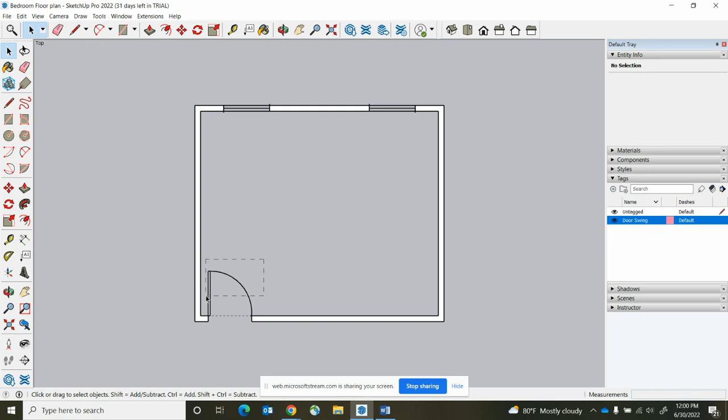Now we're going to make our 2D drawing 3D. First, I want to put my door swing on a different tag or layer to keep things clean. I'll add a tag and name it door swing. I'll select all the parts of my door swing, making sure I get even the bottom ones - you can hit Control to add to the selection. We're going to move it from untagged to door swing, and then turn it off. That'll keep it clean later on.

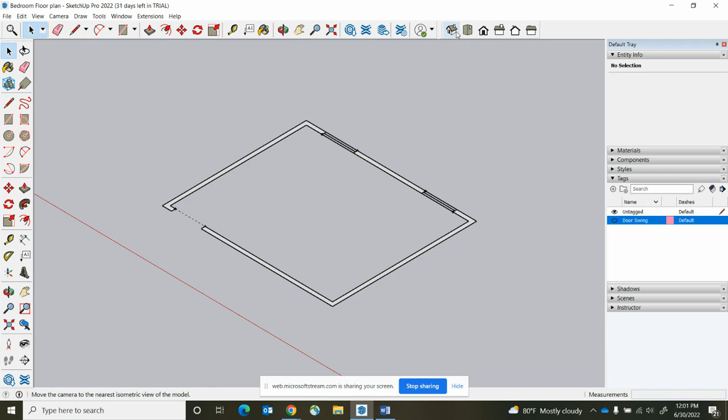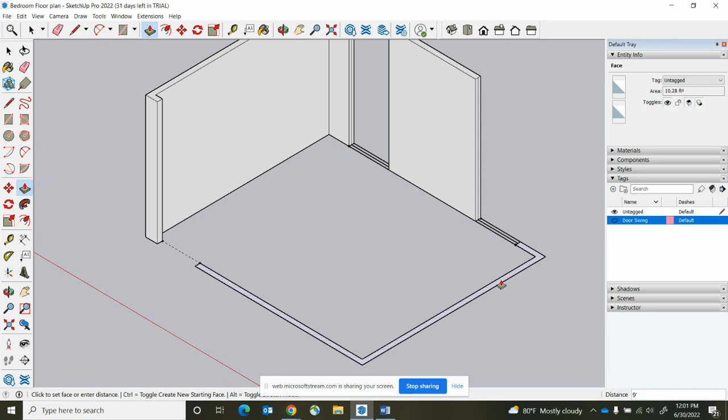Now I want to move to an isometric view to start bringing my walls up. I'm going to use the push pull tool, hover over a wall, and start to pull it up. We're going to make it 9 feet. Now I have a 9-foot wall. You can do the same thing here, bring it up to 9 feet. Once you've done a measurement, you can hover to where it's highlighted and double click, and it's automatically going to bring it up to that same height. So now I have walls.

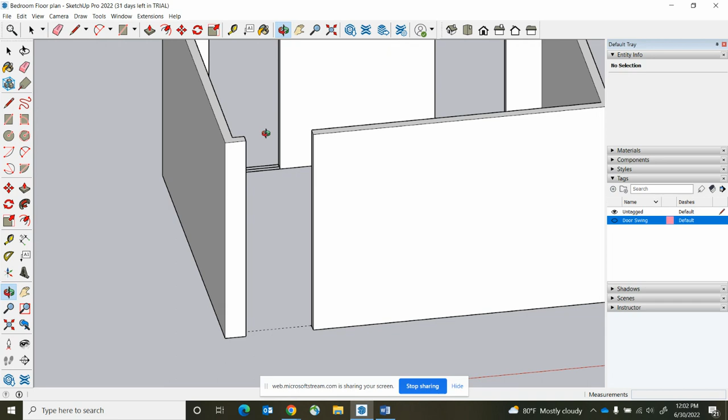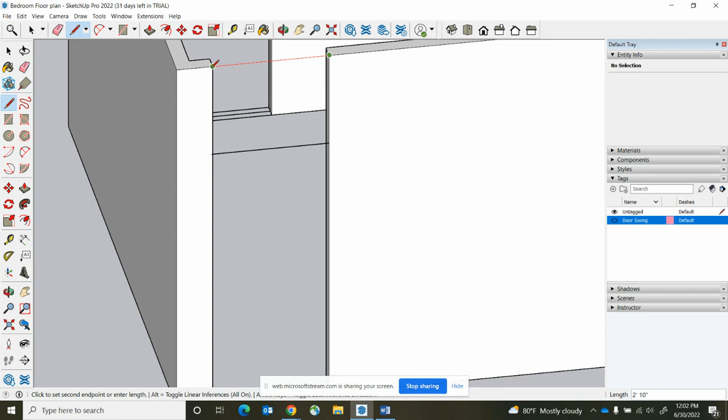There's a few more things we need to do to make it clean. We've got to finish up our walls jointed above where the door is and the windows. I'm going to use my guide tool. Typical residential doors are 6 foot 8 inches high, so I'm going to put a guide mark there. I'll use my pencil, go over the guide point - make sure you're on that red axis all the way to on edge - and then come up to the end point, again red axis to the other endpoint to fill it in. If you're not on the red axis, you might end up drawing from the front to the back, and that's going to create issues. If you run into a problem, just check that.

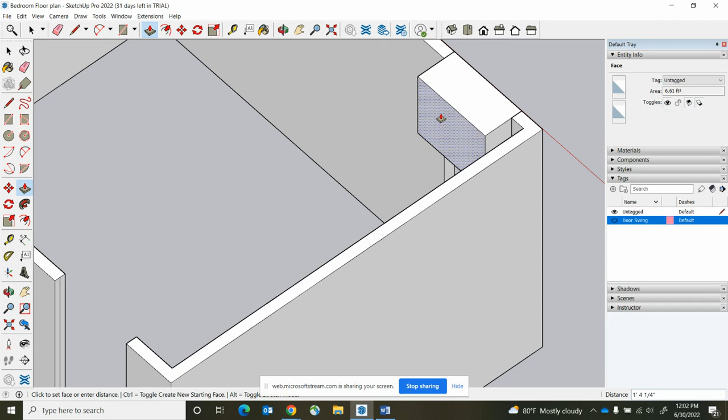Now I'm going to orbit it around so I can see the inside of it, and go back to my push-pull tool. I'm going to highlight this face. You can either type in the 4.5 inches, or hover over this endpoint and it'll line it up - that makes it much easier as I'm going along. So there I have my door opening. It's ready for a door.

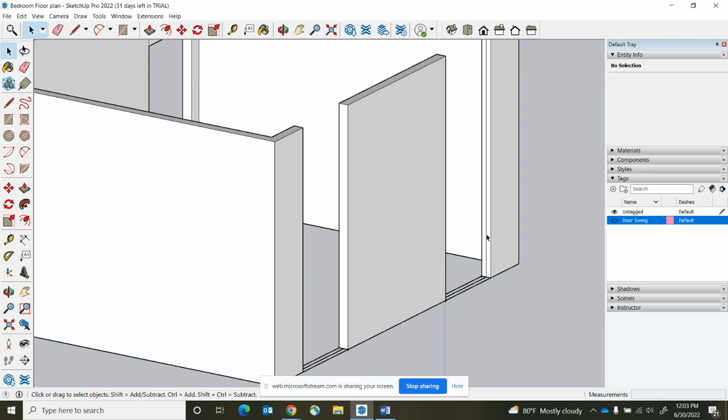Let's do the same thing to the windows. I typically do windows from the outside because it's easier to see what you're working with. When I brought my wall up, it brought this middle line from the window that I created, which I don't need, so I'm just going to highlight it and delete it. You'll see where we do this - we're going to come back and clean up some other lines so it makes it all one surface, nice and clean.

If you accidentally delete the wrong thing, just go to your edit, undo, and you're good to go. So we're going to make these - nope, I need my tick mark - we're going to make these 24 inches off the ground, and then 4 foot high. I'm making sure my line is blue, so I'm on my vertical axis, 48 inches. Go ahead and do it on this side as well.

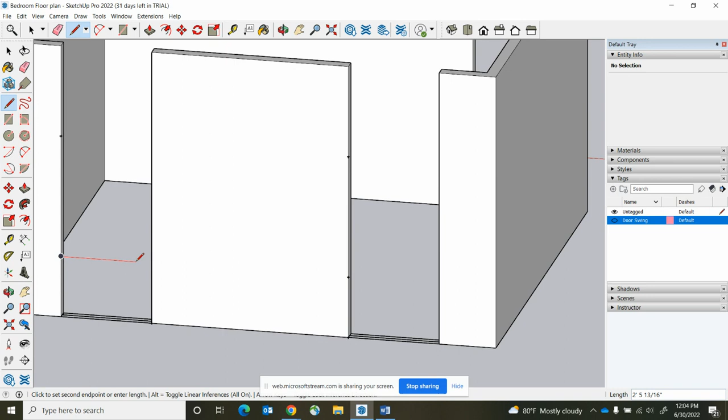24 inches, 48 inches. Okay, I'm going to jump back over to my pencil line. The guide points are easier in 3D to find for some reason - you can see I'm not having to struggle as much to find it. It's going to fill that section in, that's perfectly fine. Then come across the top, endpoint to endpoint for all of that. Since SketchUp is a 3D software, it's always trying to make shapes that it can turn into 3D, so that's why it's filling things in as it goes along. Don't get frustrated, just delete it where you don't need it.

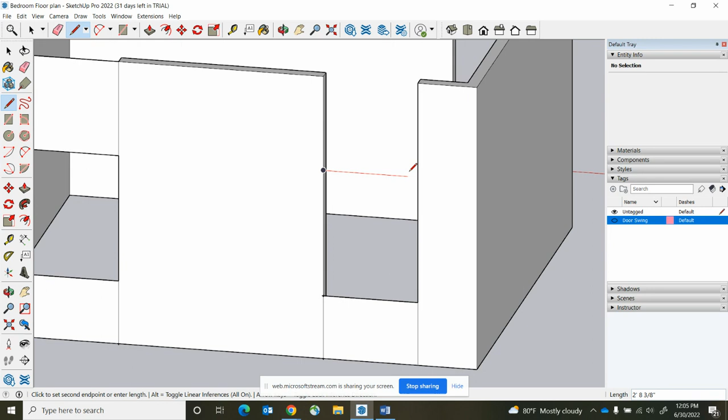You're good to go. All right, we're going to do the same thing over here. Find my guide point, red axis to on edge, guide point, red axis to on edge, and then endpoint to endpoint. You see on this one, it filled in and gave me a ceiling. I'm just going to delete that, delete this window opening.

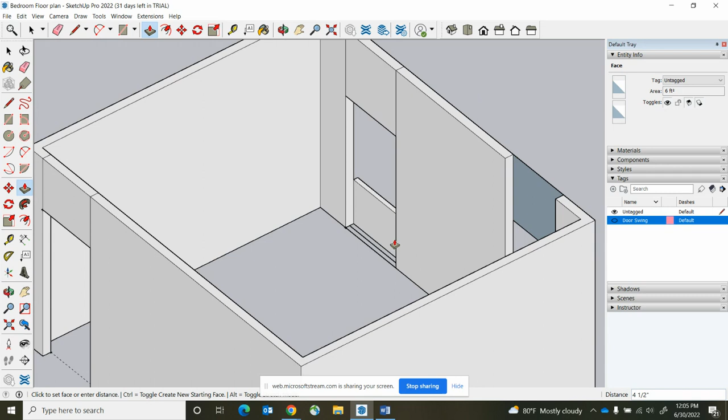I'm going to turn to the inside so I can give thickness to my walls with the push-pull tool. Again, make sure you've got the correct surface highlighted - just come and hover over that endpoint, or where it says on edge. Either one of those will work if you're not at a corner. So this one has a corner, make sure it says that. Turn so I can see this one and bring it, and it's going to say on edge.

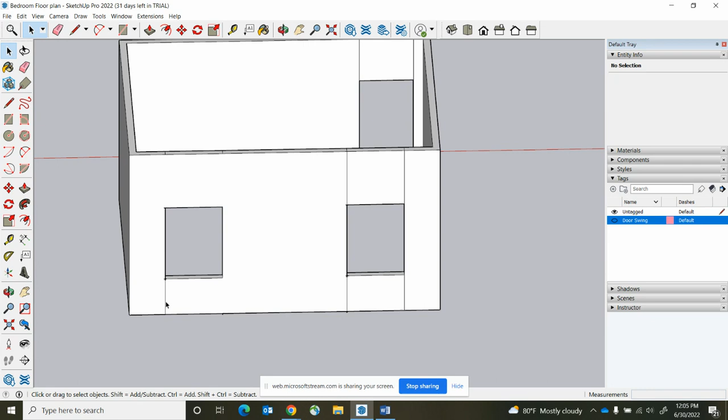Okay, so now I have it all there, but I also have these lines. Same thing, I'm going to go through and simply delete these lines as it goes through. You're going to have them on the outside, you will have some along the top, and you will also have them on the inside. So you want to go through and delete all of those. Once you do that, you'll have a clean surface, and we're going to start working on actually doing the window frames and the door itself.